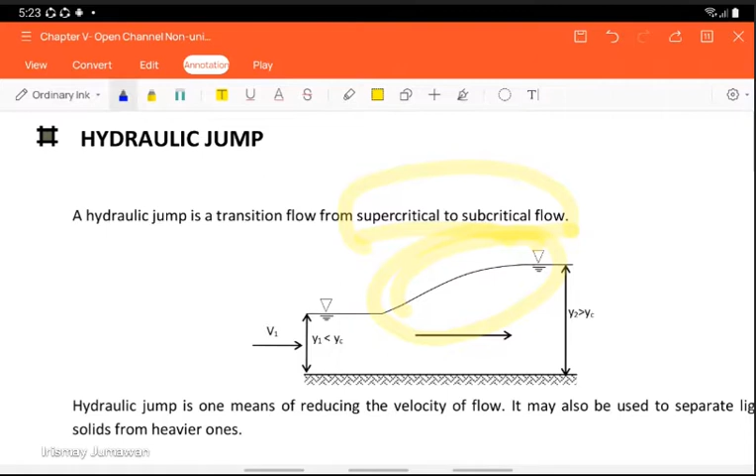It's not good that the flow of your water is supercritical downstream, because there is a possibility that if your water supercritical flow, it can cause scouring on the downstream side. So it will scour, and the structure can get damaged. That is the purpose of your hydraulic jump.

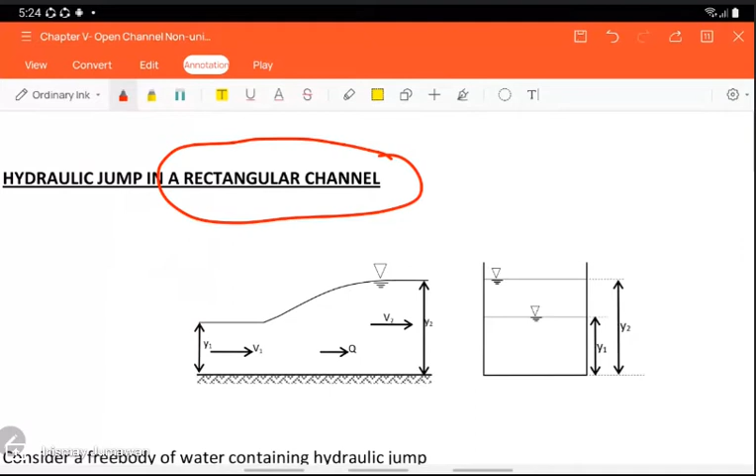If we take a free body diagram of this hydraulic jump, you have to take note of whatever formulas we get here. This is only for a rectangular canal. Okay, so we have here a rectangular canal.

And if we take the free body diagram of this hydraulic jump, you remember the impulse momentum equation, or the effect of impulse momentum in your fluid mechanics. So this is also one of the applications.

You remember the bending in a pipe, if you have a curvature of your pipe, or if the flow of your water travels in a curved vane, in a curved path.

Velocity are vectors. So when you say vectors, you have the magnitude and direction. So all forces going up and going right, that is positive, and also your velocity. If your forces are going left and going down, you have a negative direction. So we have to remember the direction of things.

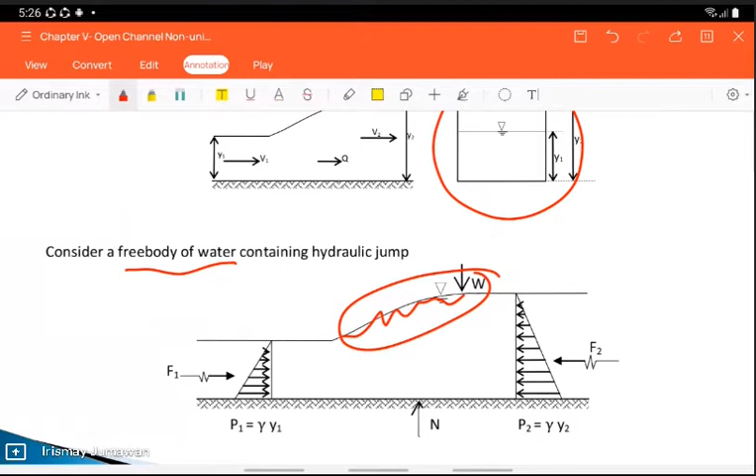So if we take the free body diagram of this hydraulic jump, okay, this is the jump. You have here the wave creating the wave of your channel because there is a change of the slope, from supercritical to subcritical, or from less than critical flows to greater than critical flows until normal depth.

So you have here y1 because the depth here is less than yc. So this is supercritical flow. Over here, your depth is greater than yc. So you have the subcritical flow until you have a normal depth.

So here in the jump, the depth of flow can change from less than critical or greater than critical to a uniform flow. You have to remember that after the occurrence of the hydraulic jump, uniform flow will be achieved.

So just take a look at this. This is the distance of the jump. The distance here is relatively small. We've just made it look bigger in the diagram, but in the actual case, it is relatively small.

That's why the friction between the bed or between the wall of the canal is negligible, because, as I've said, of the distance. We have here the normal force, and the one that counteracts your normal force is the weight. Okay, we have here the weight.

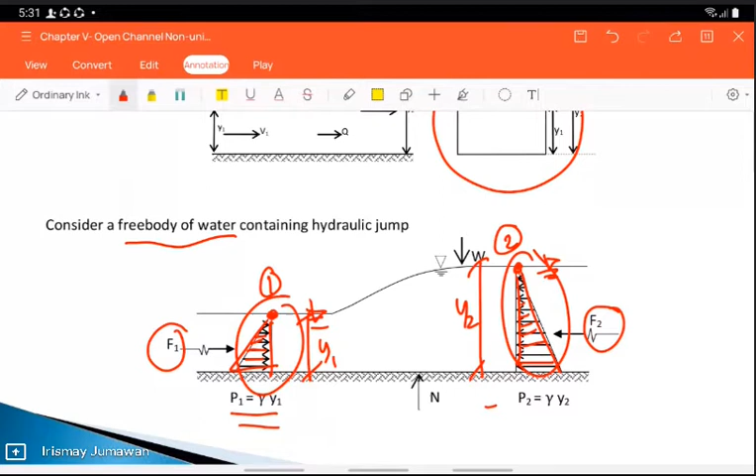As you go deeper, your pressure will increase, so that is in the form of a triangular pressure distribution of your hydrostatic force. You have to remember this is the hydrostatic force, and this is also one of the applications you've learned in fluid mechanics from forces acting on plane surfaces. I hope you remember that. That is the force acting on a surface, because you have two cases: force acting on a plane surface and force acting on a curved surface.

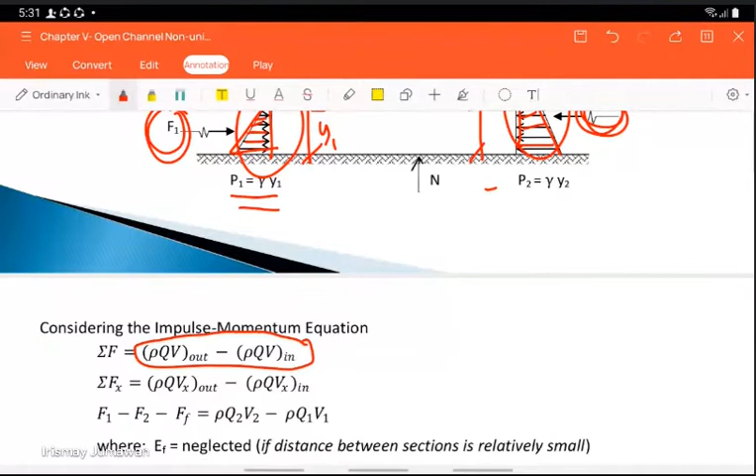So here, the change of the momentum of the fluid is equal to the density of the fluid times the flow rate times the velocity going out, minus the density of the fluid times the flow rate times the velocity going in. So that is the impulse and momentum equation.

So the formula for this: these forces F1 and F2 are your unbalanced forces, and these unbalanced forces are equal to the rate of momentum. This is the formula for the rate of momentum.

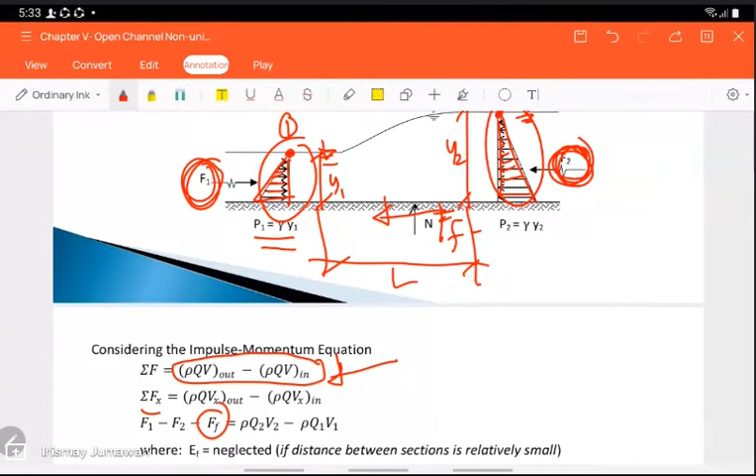We take summation of forces in x direction. So you have here F1 minus F2 minus friction, because you have the friction here. We neglect it, but if you need to consider the friction factor, you have to account for it if it's present. But as I've said, we neglect it because the distance of this hydraulic jump is relatively small. So we have to neglect this.

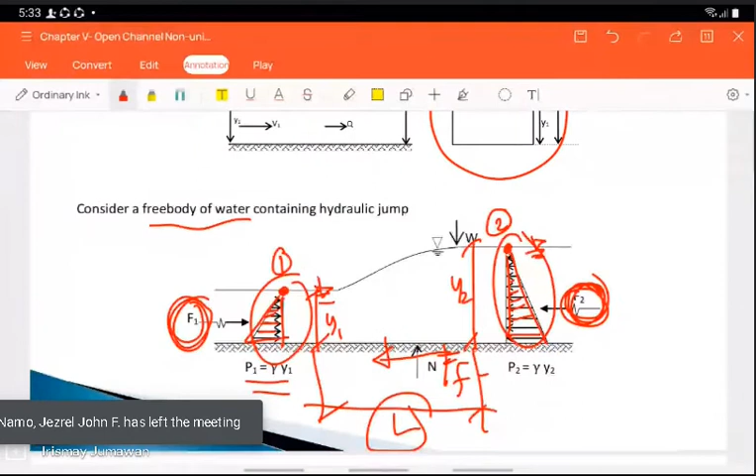This is friction. So looking back for the F1, looking back for the force.

For the force, or pressure, from the strength of materials, we discussed force here. So pressure is equal to force divided by area, so force is equal to pressure times area.

So getting the formula for your F1, you just take the area of the pressure. So the area of the pressure there is 1/2 P1 times Y1. Okay, 1/2 P1 times Y1, where your P1 is gamma times Y1. So your F1 is just equal to 1/2 gamma Y1 squared.

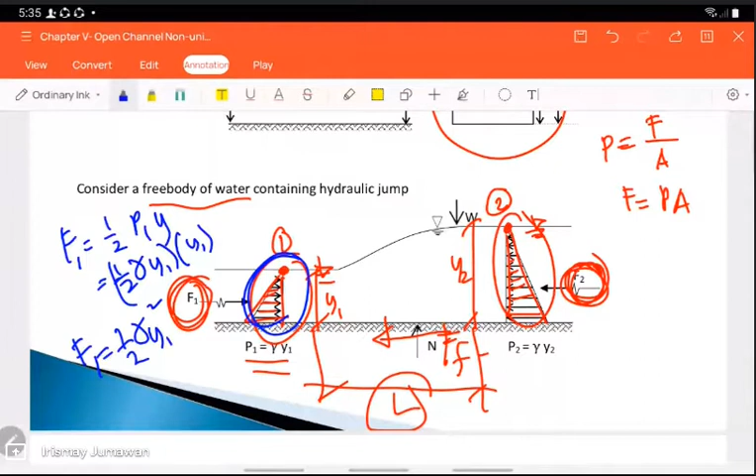Times 1/2 Y1 times P1, 1/2 Y1 times P, times B. So we have that, 1/2. So this is now the formula.

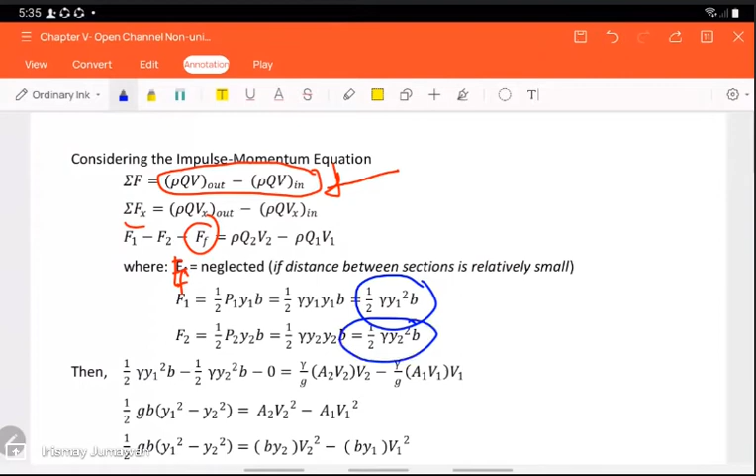You have Y1, 1/2 Y1 squared gamma times B, same as your P. If you remember also this formula.

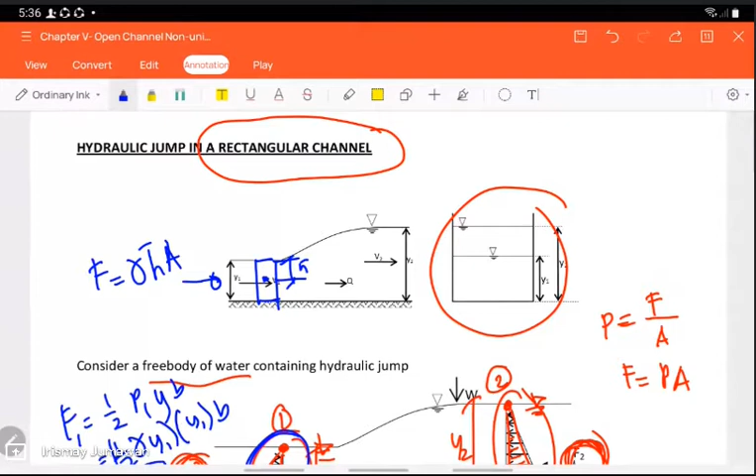For plane surfaces, this is from the centroid. So the force here is just equal to gamma times h-bar times area. Your h-bar is equal to 1/2 Y, and your area is Y1 times the width of the channel. So we have 1/2 Y times the area, which is b times y. If we simplify this, you have 1/2 gamma Y squared.

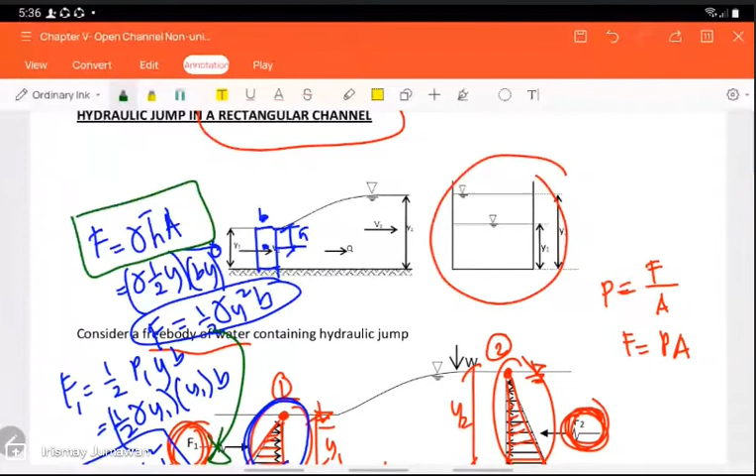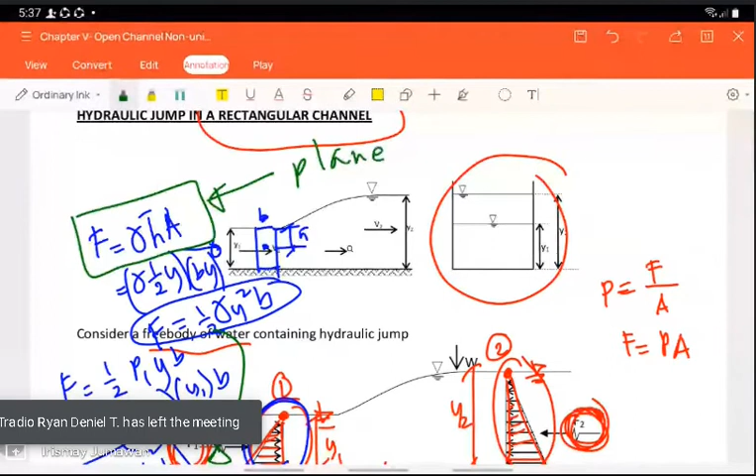So it's the same result, whether you use this formula or 1/2 gamma times A. This is an application of the pressure prism, if you've discussed that already. If you have a rectangular area, that is how we determine the force — this can also be taken when you have the force acting on the plane surface. This relates to the pressure prism.

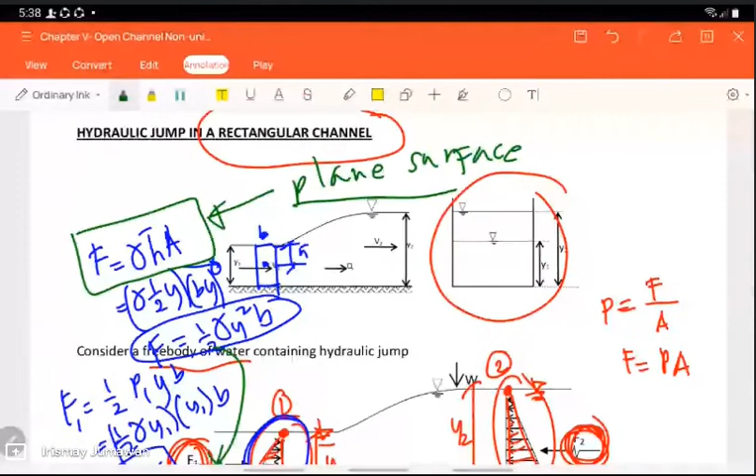This can also be applied to the one above, this is the formula for the force acting on a plane surface, and that is also the formula for the pressure prism.

You can also apply this in getting the force of the dam. So what you learned about force acting on plane surfaces, or the application of the pressure prism, will also be applied to the dam.

Hope you will not forget it.

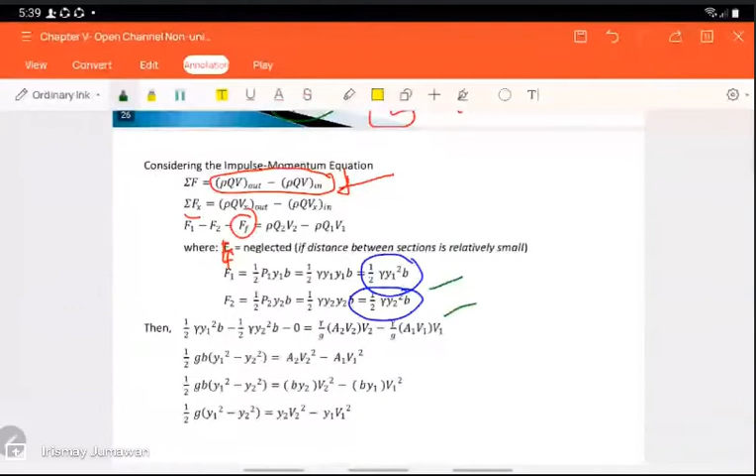Again, for water that's the hydrostatic force, so any formula you can use for that. We have here 1/2 gamma y1 squared b for F1, and for F2 you have 1/2 gamma y2 squared times b.

So we will substitute this into this equation, and now we will derive.

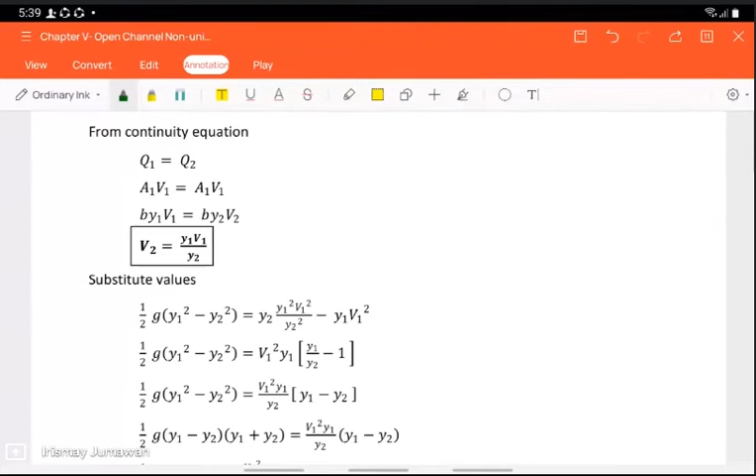By applying also the continuity equation, because we are dealing with water, and water is an incompressible fluid, we have Q1 equal to Q2.

So getting the value of V2, we can have this equation. This is now the formula of your velocity, the velocity after the jump.

This is the velocity before the jump, of course. You can memorize this one. So it means once you have the depth before and after the jump, you can get the velocity of the jump.

We will use this one in getting the discharge. This discharge is the unit discharge.

Again, if you are given the two depths, the depth before the jump and after the jump, you can determine the unit discharge.

But since our Q is equal to q times B, we can get the discharge. This small q is the unit discharge, and this big Q is the discharge.

So you have to be careful how you apply this. This unit, cubic meter per second, is per meter width.

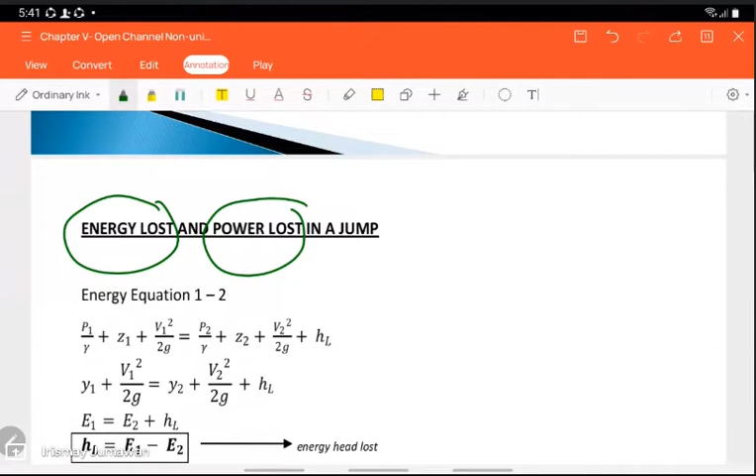Now we have to get also the energy and the power lost in the jump, so you just use the energy equation.

Using the energy equation, the head loss of the jump is just the difference between the specific energy of the water before the jump and after the jump.

And power is just equal to specific weight of water times Q times head loss. This is the formula for getting the power lost.

Okay, so this is for getting the discharge.

So you have there the depths of flow. But how about if only one depth is given?

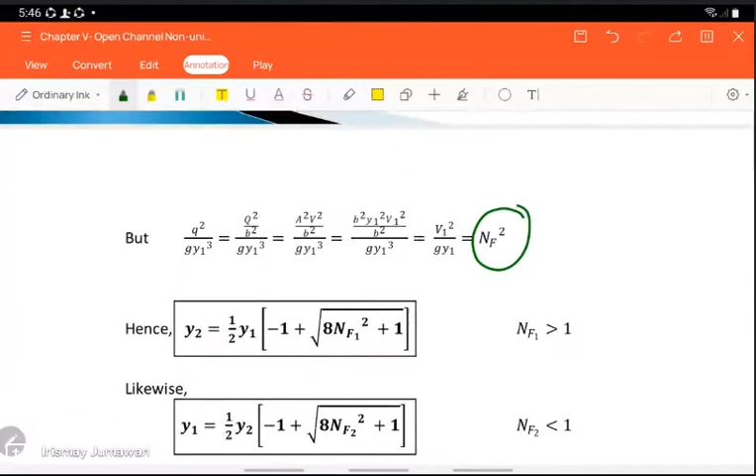Okay, so you have this formula, but this one can also be simplified. So we have q squared over g y1 to the 3rd power.

Okay, this is one. So when you derive this, it will result to v over the square root of g y.

If your flow is critical, your depth is also critical. But if it's not critical depth, then your velocity also is not critical.

So that is the formula for the Froude number. If you square this one, the result is equal to v squared over g y.

So the final derivation is this one. The depth after the jump is equal to one half y1 times negative 1 plus square root of...

You have to check that the Froude number is greater than 1. So your y here is less than y2. So if this y is less than y2, that is supercritical.

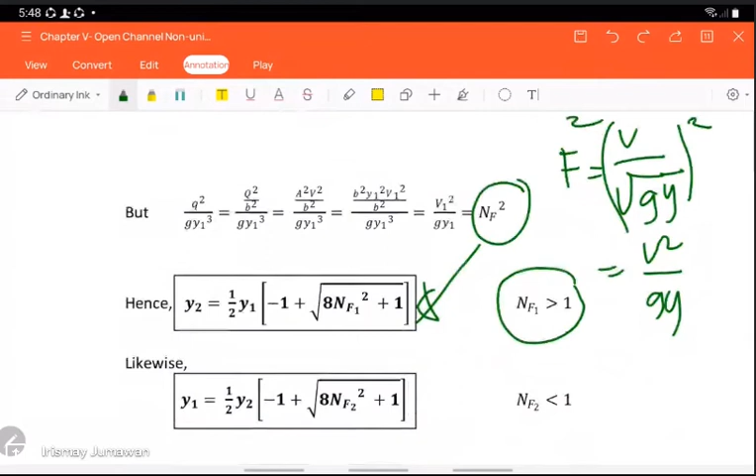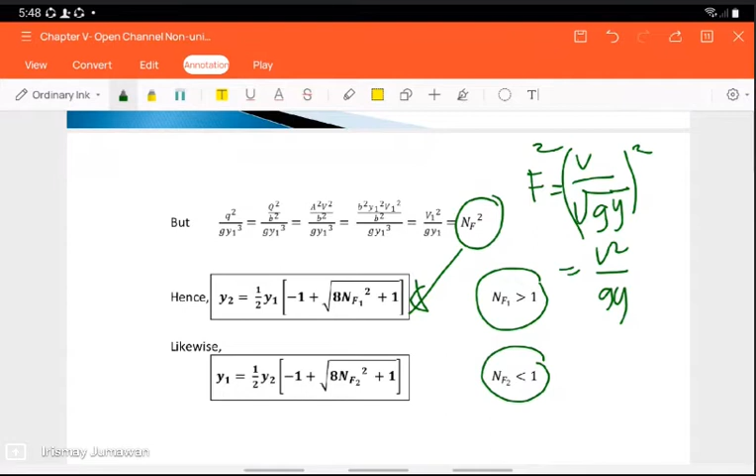For the depth before the jump, it should be that the Froude number is less than 1. If it is not less than 1, your depth of flow means no hydraulic jump will occur. You have to remember, even if the problem asks what will be the depth for the jump, when you solve it, you can answer that question by saying there's no hydraulic jump.

It's not necessary that it will occur just because it's asked in the problem. You still have to solve it. If it occurs, the depth before the jump is equal to this. But you can also say there is no hydraulic jump because the Froude number is not less than 1. So that can be your answer.

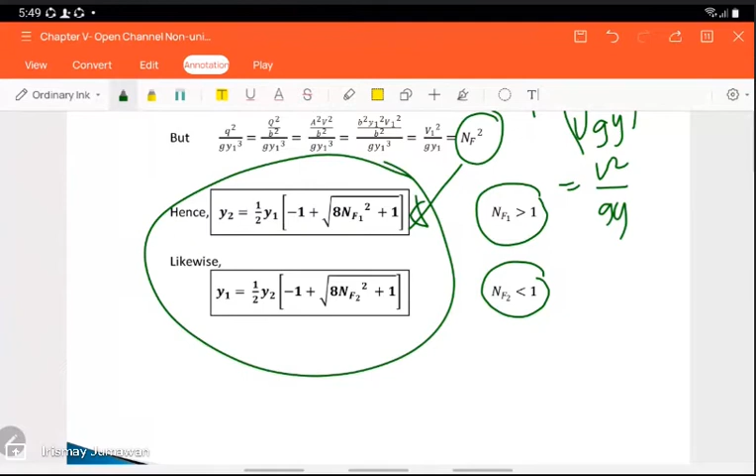Okay, so again, this problem can be applied only for rectangular sections.

For the rectangular sections, we will go back again to the derivation. This is the area, then we break it down by b because the area is equal to b times y, since the canal is rectangular.

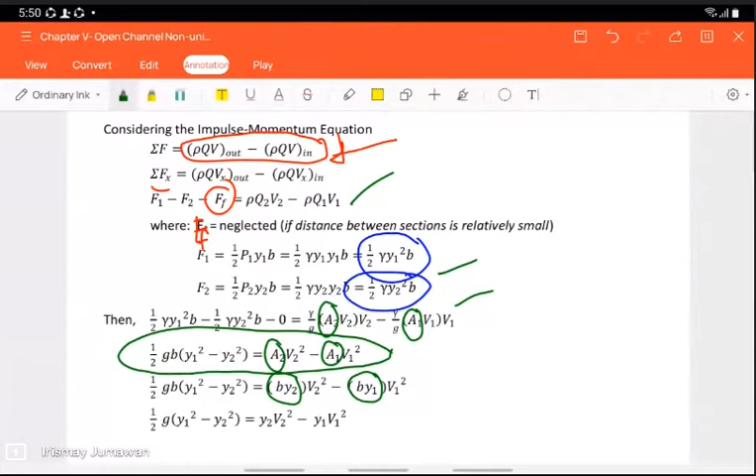In this case, we have to retain area 1 and area 2 because we don't know the type of the channel, so it is not a rectangular channel. Just retain area 1 and area 2 in your equation.

So here, this is the hydraulic jump in a non-rectangular section. Take note, class, the depth or the location of the centroid is located from the water surface.

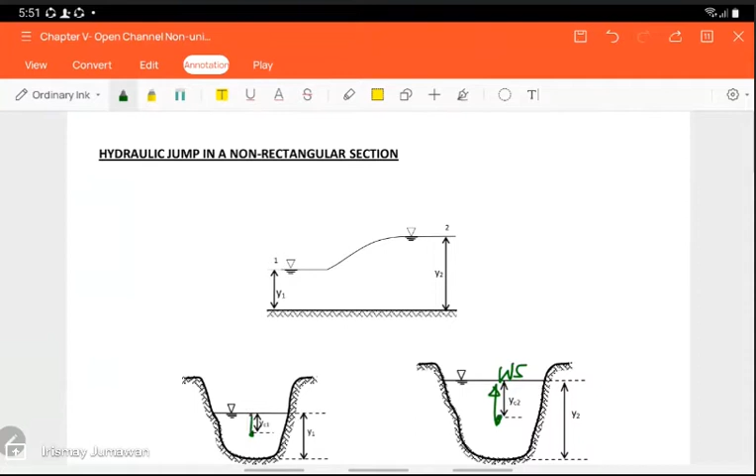That is the location of the centroid of your channel, measured from the water surface. If you don't know the location of the centroid of the channel, like a trapezoidal section...

What you do is bisect it. You divide the trapezoid into a rectangle and a triangle because those are basic shapes. We know the centroid of those. So if this is your trapezoidal section, we will divide it, then get the centroid.

So if that is the centroid, that is measured from the water surface. And also here, that is from the water surface.

If you know the location directly of the trapezoidal centroid, you have to memorize the formula. We have a formula, the trapezoidal section centroid formula. So if you know the location of the centroid directly, you can use that formula.

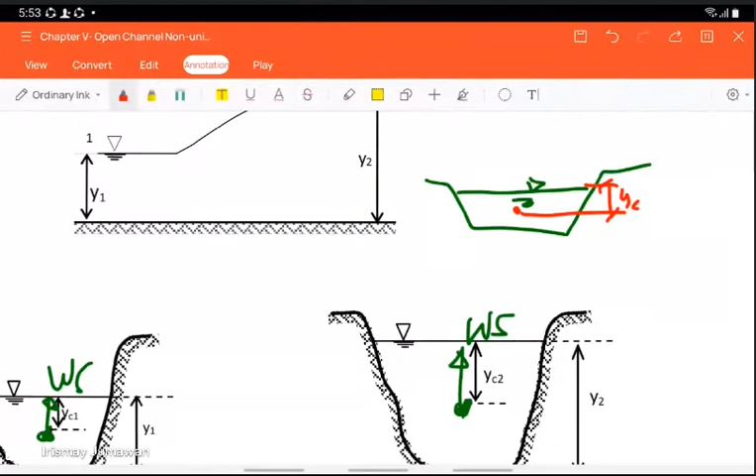But for me, it's easier to get the centroids by dividing the section into basic shapes and memorizing the basic formulas. So this is for the non-rectangular case.

Okay, so again, I told you to retain the area. So we have this equation, and for the velocity of the jump, you have this equation. You can interchange the numerator and denominator, so you can use either formula.

Next class... my screen disappeared. It's gone, ma'am.

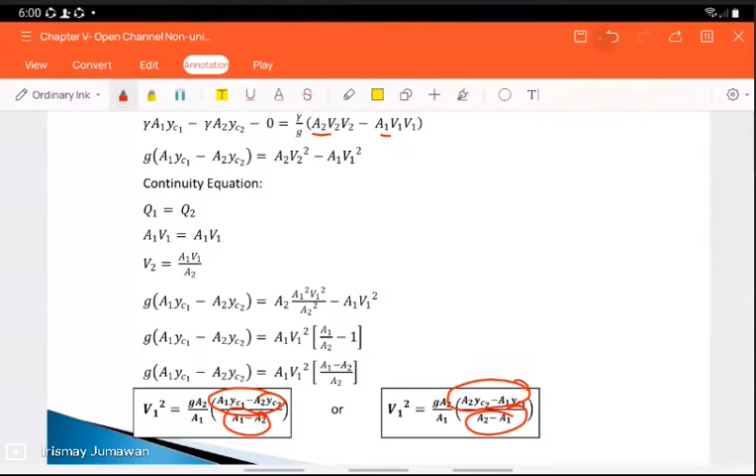Okay, so you can choose either formula, you can interchange them. Okay, so another one is this. Okay, you can use this one.

That is, q squared over g is equal to a1 yc1 minus a2 yc2, over 1 over a2 minus 1 over a1. So that is the formula for the non-rectangular section.

But you can still apply that formula for a rectangular section. So more or less, that is the general formula for the computation of the discharge. Okay, so please take note of these formulas.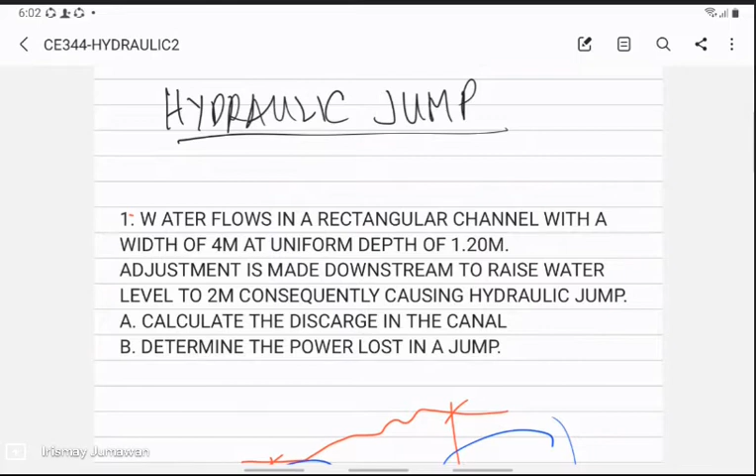Okay, so we have here different problems. We have a rectangular channel with a width of 4 meters at a depth of 1.2 meters. An adjustment is made downstream to raise the water level to 2 meters, based on the slope adjustment. This will cause a hydraulic jump. We will calculate the discharge in the canal and determine the power loss in the jump.

So here we can illustrate a problem like this. We have 1.2 that is the depth before the jump, and after the jump you have a uniform depth of...

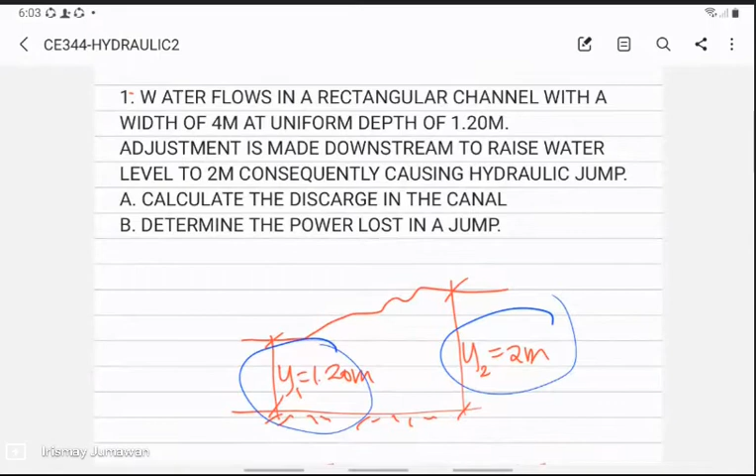Okay, you have to be careful. There are some depths given in the problem, but that is not the depth for the jump. You need to compute first the depth before and after the jump. In the problem, we assume that the depth before the jump is 1.2 meters, and the depth upon adjusting the level, since it is said to jump...

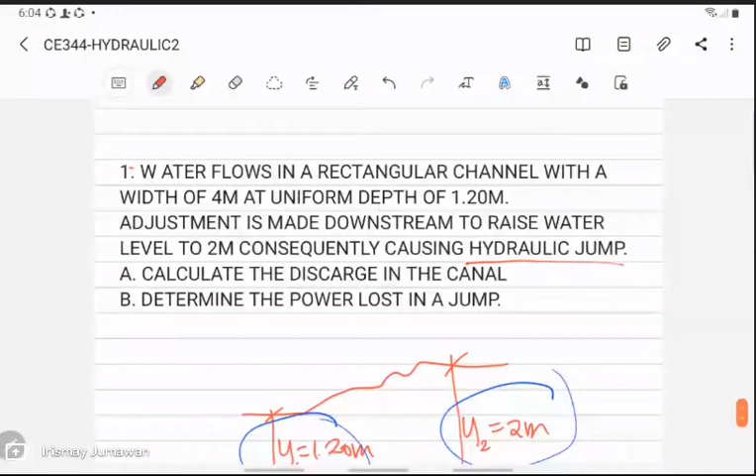Okay, when it adjusts, this is a hydraulic jump to 2 meters. So we will assume that these are the depths for the jump because of this statement. So we have here, before and after the jump.

So we see if we check the cross section or the side view. But if we try to see the left side view, we can have this rectangular section. So you have here that is one, and we are talking the same here. So we have 4 meters width.

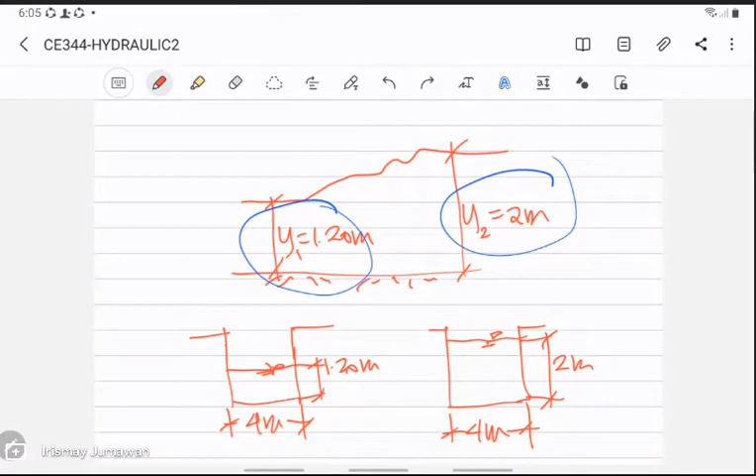Okay, since two depths are equal, are given from the equation, as long as you have two depths - that is the depth before the jump and the depth after the jump - you can get the discharge directly.

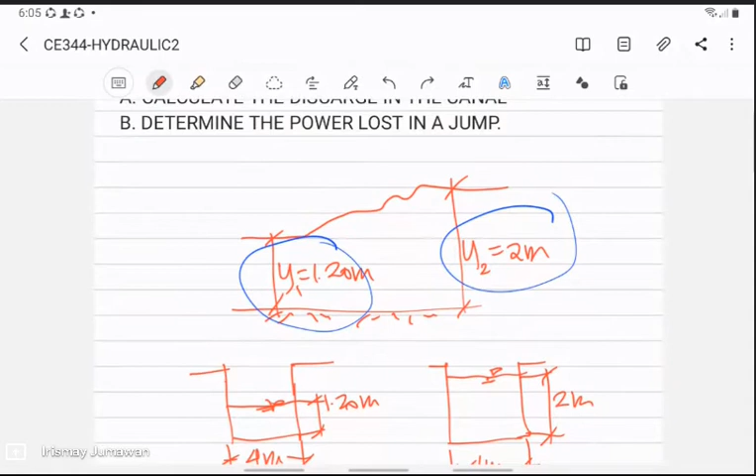Before getting the discharge, you need the unit discharge. So we have the formula Q squared is equal to one half GY1Y2 times Y1 plus Y2. So we can compute the Q squared.

I have to tell you, please don't write like this. So if you have this one, 6.138, that is cubic meter per second, that is meter squared per second, because you can cancel the per meter width, or you can say 6.138 cubic meter per meter width of the channel.

Don't put this symbol. Same with your exam last time, the diameter is 0.159 m, and you will say 159 meters, and is equal to 159 mm. If you write that way, please read it - if you write that way, what would you read? Is it 0.159 meters divided by 159 mm?

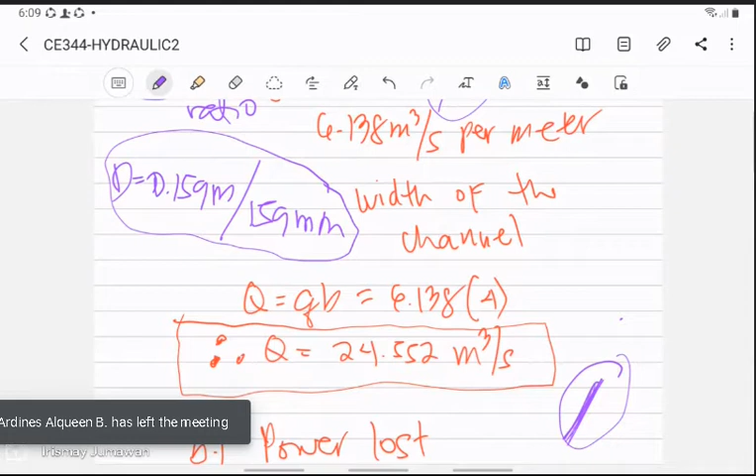Or, slash, ma'am? Sorry, or. Or then slash. Slash then. Slash. Okay. Can it be put over, ma'am? No, like in Tagalog we say over.

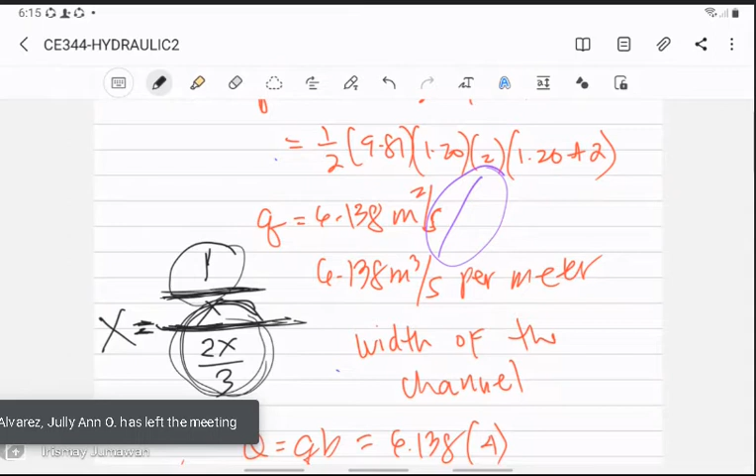It gives another meaning, so you have to write it. Write it clearly - maybe you can say 'or', 'per second' or similar - you have to write the word.

So again, this is Q, that is the unit discharge. But what's being asked in the channel is the big discharge, QB. So we have the big discharge, that is 6.138 times the width of the channel, which is 4. So that is 24.552 cubic meters per second. That is the answer.

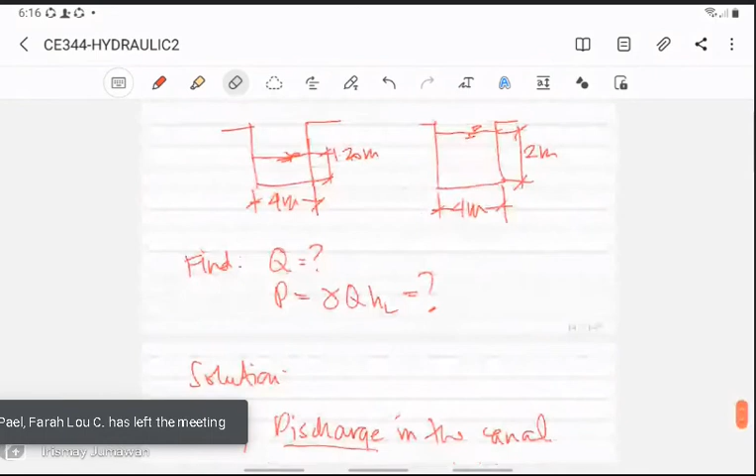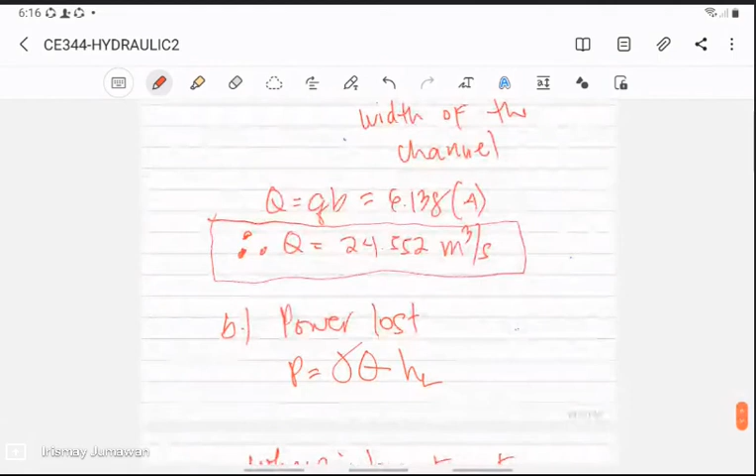Another problem - this is head loss. The head loss is just equal to the change of the specific energy. Where is this derived from? You get the energy equation from section 1 to section 2. So just get the difference between the specific energy before the jump and the specific energy after the jump. So we have here the formula: HL is equal to E1 minus E2. Your specific energy is equal to Y plus V squared over 2G.

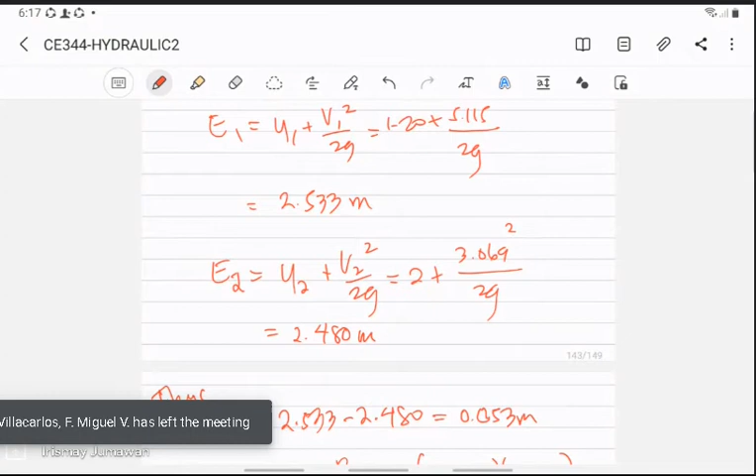So we need to determine V1. What are V1 and V2? Once you get V1, you can get the energy at section 1. You also get the energy at section 2, or the energy after the jump. Then you determine the difference between these specific energies. Once you have your head loss, you can get the power loss.

Since nothing specific was given in the problem, power will be answered in kilowatts or watts. That answer is 12.765. If you like to convert it to HP, you have to divide by 746. So the answer is 12.765 kilowatts. Okay, so that is the answer to problem 1.

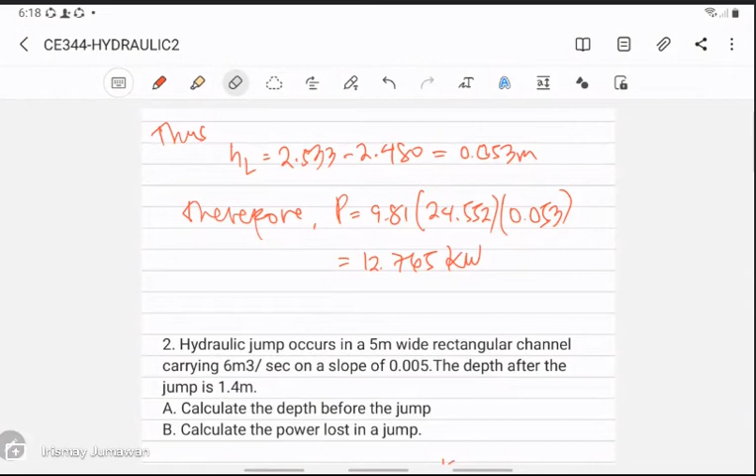Okay, I have here another problem. We have a hydraulic jump occurs in a 5 meters wide rectangular channel. The discharge is 6 cubic meters per second.

Then the bed slope is 0.005. The specified depth after the jump is 1.4. We need to find: what is the depth before the jump? As I told you earlier, even when asked what is the depth before the jump,

it doesn't mean you just answer it directly. You might say 'therefore, the depth before the jump is equal to...' but it's possible that there's no hydraulic jump that will occur. So there's a possibility you'll say there's no hydraulic jump occurring. That is your possible answer.

You shouldn't force yourself to say the depth before the jump is equal to 1.2. No, check if that answer makes sense. These are tricky questions, so you have to be careful.

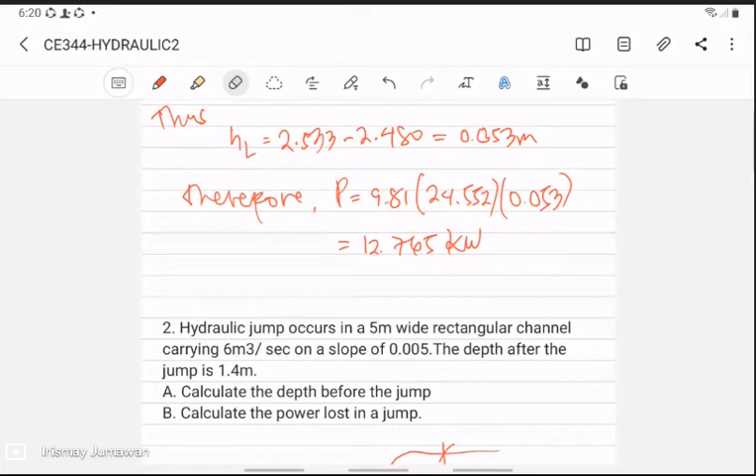So we have here: y2 is 1.4, that's why it says the depth after the jump is 1.4 meters. Calculate the depth before the jump. We don't know yet if there's a hydraulic jump. What I know is that after the hydraulic jump, normal flow will be observed.

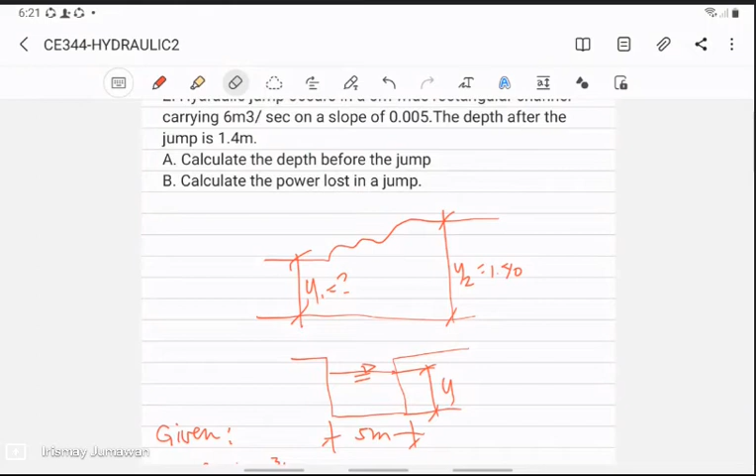So here, still a rectangular channel, you have 5 for the width and y as the depth of flow. Okay, so the given values: you have 6 cubic meters per second and the slope is 0.005.

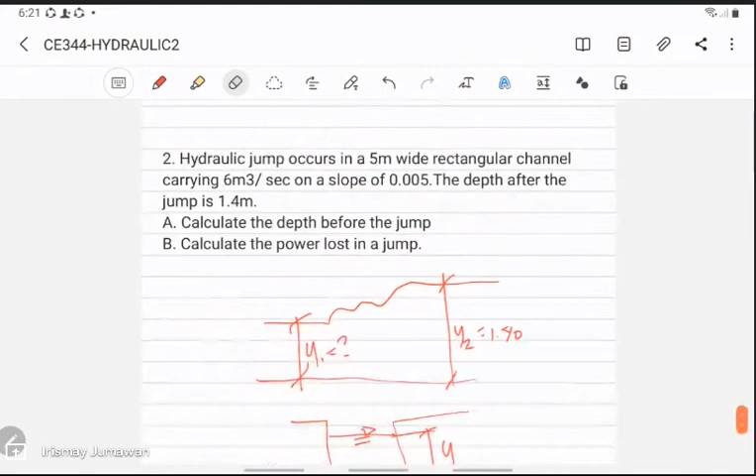So what you're going to do is apply that formula for determining the depth before the jump. Okay, that is y1, so find y1. It's not y2, it's y1 - the depth before the jump, after the jump that is y1... okay, so this is the depth before the jump, that is the formula. Okay, we have here the Froude number.

Okay, so you have y1. So we have here the depth, y2. We need to determine the Froude number.

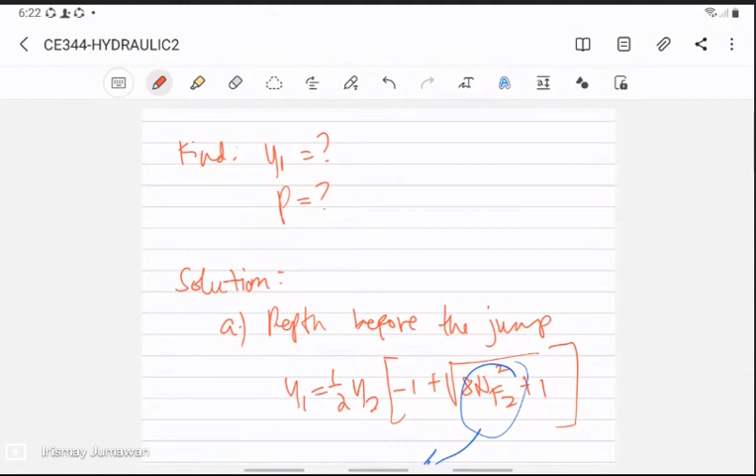What is the formula of the Froude number again? Velocity, ma'am, over the square root of gd.

Okay, that can be applied only for rectangular channels. For a non-rectangular channel, that is equal to velocity over the denominator square root of g times A over B. Okay, so you have to remember that.

So we have here, if your depth is critical, to have a critical depth. If you don't have a critical depth, the velocity there changes. So I'll use this one.

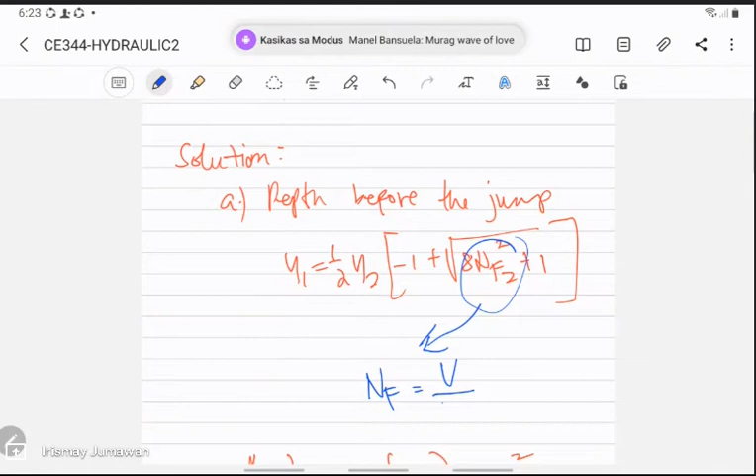So this is square root of gy. If your depth is critical, your velocity is also critical. So we need to get the area so we can get velocity, given the minimum q.

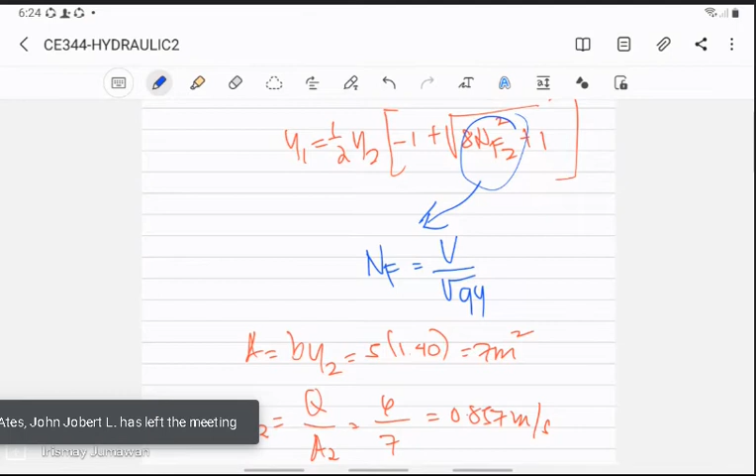So velocity is 0.857. Okay, that is V2.

Given y2, you have 1.4. So this is 0.857 divided by the square root of 9.81 times 1.4.

So the Froude number is less than 1.0. So what is your statement there?

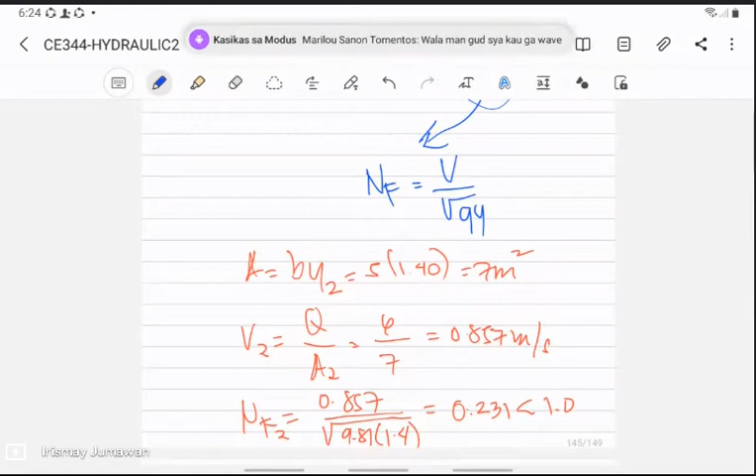Hmm? Ano sa statement ninyo din?

Hydraulic jump, of course.

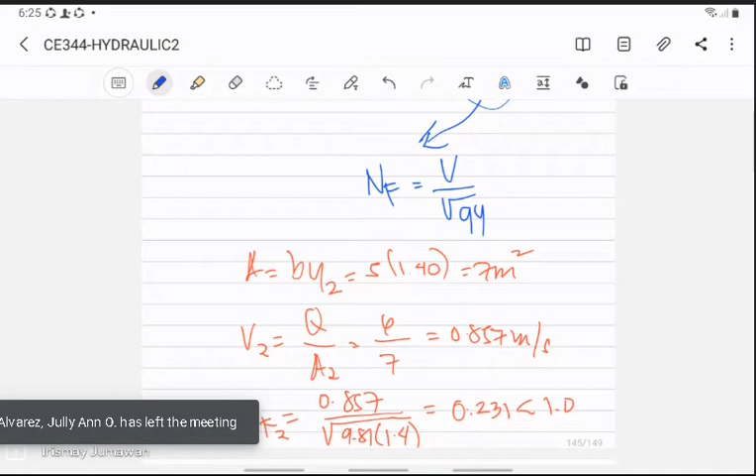How about the others, in F1? No hydraulic jump, ma'am. No hydraulic jump.

So you have to think once you answer there.

What is your final answer?

There's hydraulic jump, because from the condition of hydraulic jump, ma'am, F2 is less than 1.

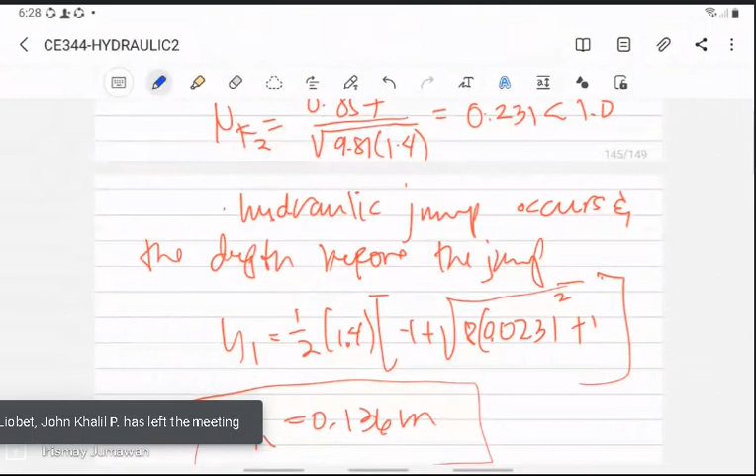Okay, so if the Froude number is greater than 1, then there's no hydraulic jump. So you have to be careful in this problem.

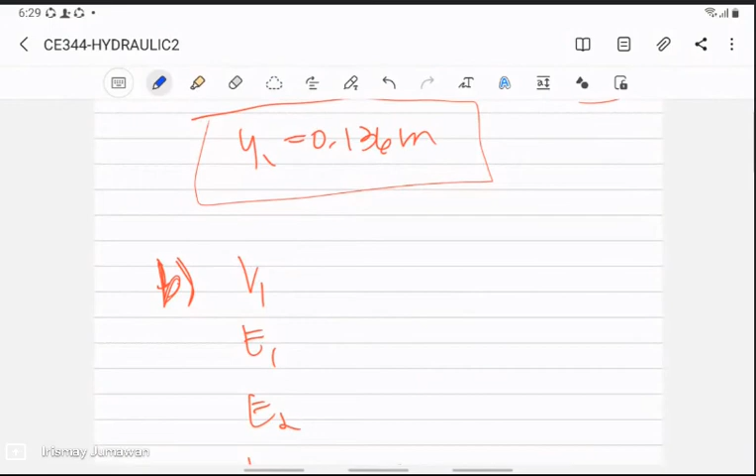Okay, regarding energy, look carefully: in terms of energy, is the energy at section 1 or section 2 the energy before the jump or after the jump?

Before. That is because of the loss of energy.

Because of the loss of energy in the jump, the total energy after the jump is less than the energy before the jump. So if we look, that 2.533 is the energy before the jump, and after the jump, that is 2.480.

So if you're asked what happens to the energy before and after the jump, we will answer that the energy after the jump is lesser compared to the energy before the jump occurred.

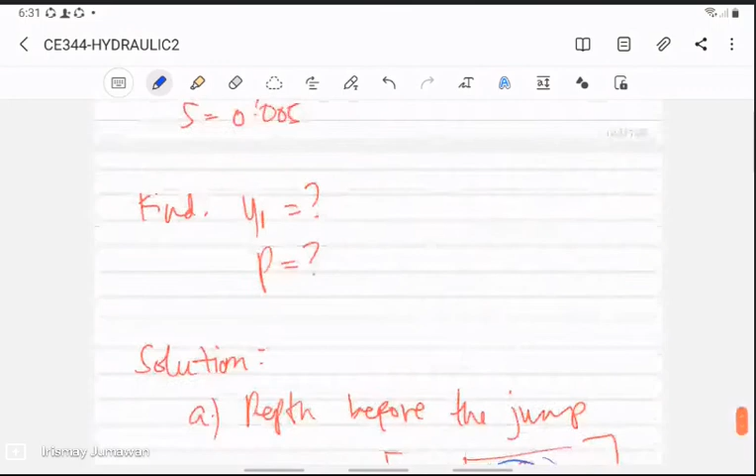You can derive the head loss formula, since our head loss is expressed in terms of the energy.

Just remember, that is only the difference in energy. But if we trace where it comes from, the head loss is expressed just between the depths of flow—you can derive that formula. Where does it come from when deriving? That is also taken from the difference of the energy.

You just add that in, expressing your velocity in terms of depth of flow. For getting velocity into depth of flow, we have the formula for velocity given the unit discharge, expressed in terms of depth of flow before and after the jump. Until your equation for head loss becomes equal to the difference of these depths.

That's it. So if you're given the depth of flow before and after the jump, you can get the head loss. You can derive that formula. Or is that okay?

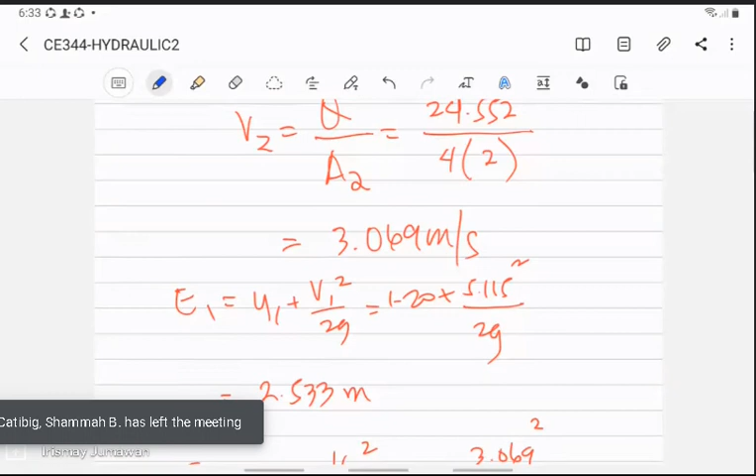What is V1 here? We don't have the V1 yet, so we need to determine it. So V1 is...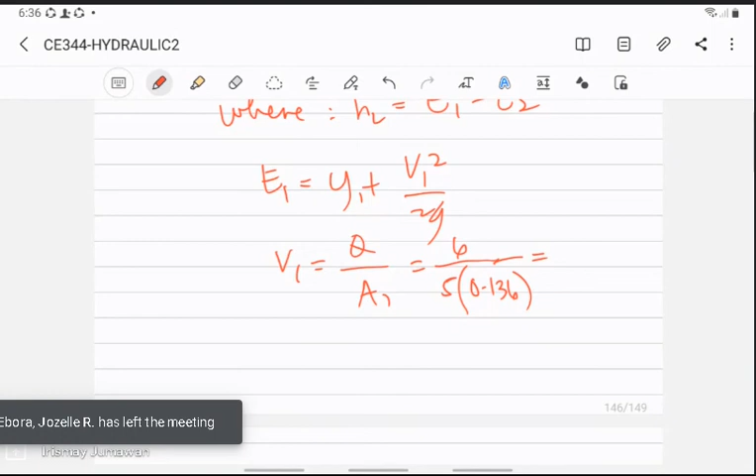Okay, you have here V1 equals 6. So 6 divided by 5 times 0.136. This is equal to, and you compute with a calculator, 8.824 meters per second.

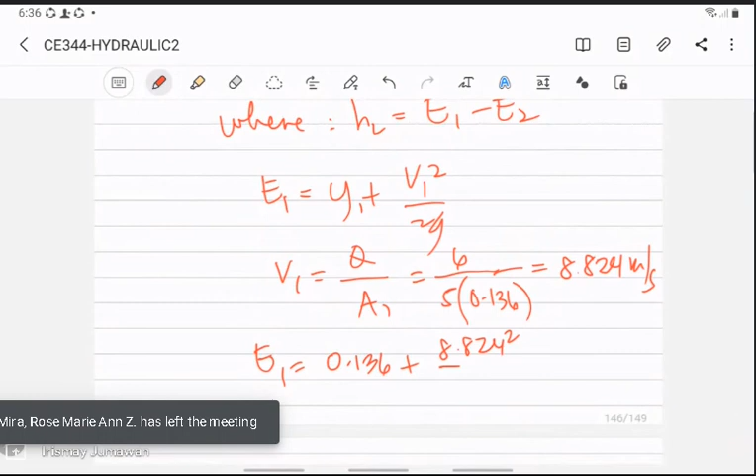So you have that is equal to, then that is 0.136, 8.824 squared over 2G. Is equal to how many? 4.105.

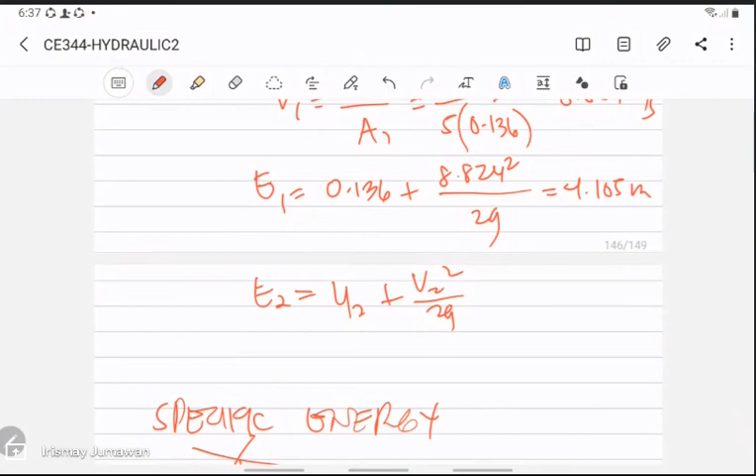4.105. And for E2, we write y2 plus V2 squared over 2G. Okay, so I write 2.

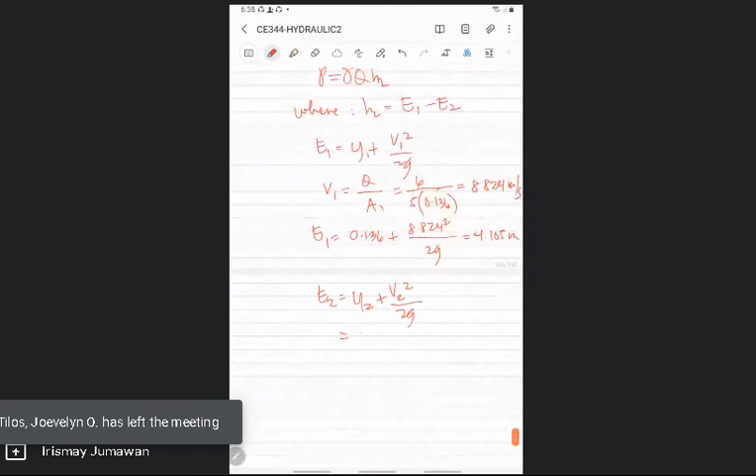Y2 is 1.4, plus V2 is 0.857. How much is that? Seven? 7, ma'am. Yes, ma'am.

Okay, so head loss is equal to E1 minus E2, which is 4.105. Imagine, the energy before the jump is 4.1. After the jump, it is only 1.437. So it is very small.

So 4.105, okay, that is 2.668 meters.

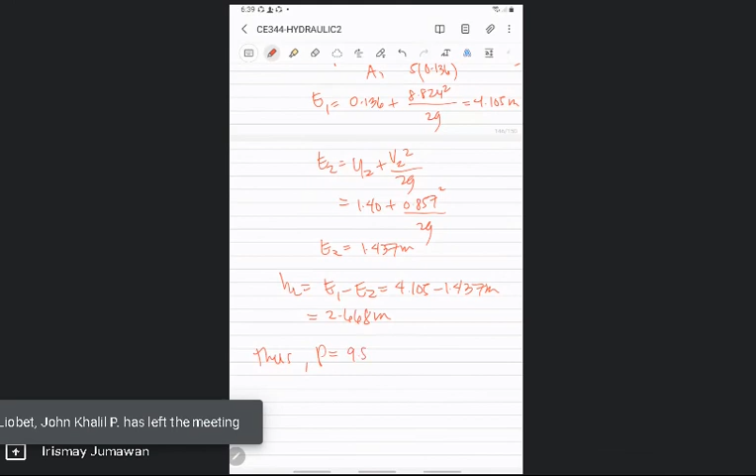So thus the power is equal to gamma Q times HL. So we have here 9.81 times 6 times 2.668. That is equal to 58.86 times 2.668, that is 157.03 kilowatts. Okay, that is exactly plus...

Let me check. Okay, so at 6:42, what I'm going to let you do, so this is the answer, 157. You can practice this.